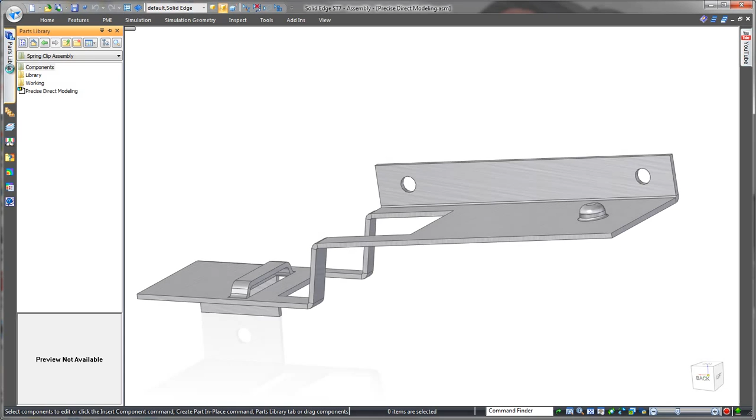Let's take a look at the precise parametric control on offer while we progress our spring clip concept. First, let's bring in our spring clip and assemble it with the parts it was intended for: the clip to the base, and the USB block it needs to hold.

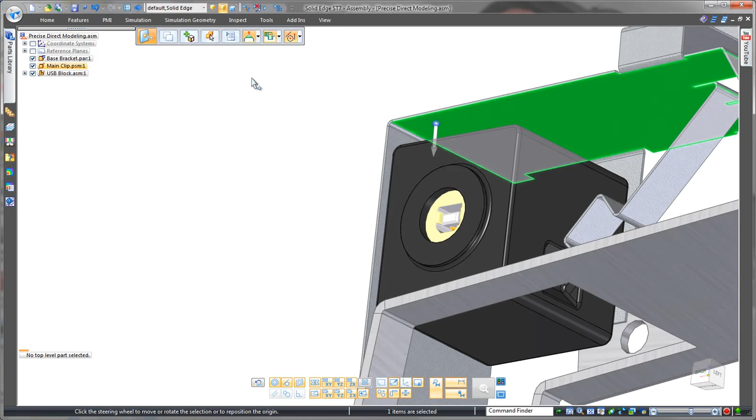The first precise change we need to make is to close up this gap between the top of the USB block and the spring clip. In most any other CAD system, you'd have to make this change at the 2D sketch level with sketch relations. In Solid Edge, we can simply relate faces in 3D instead.

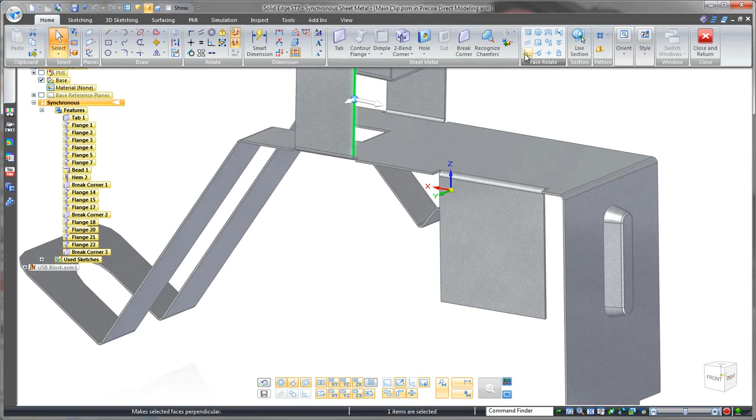Easy. Looking at the back, I noticed the tabs on the top are not quite square with the top face. No problem, a couple more 3D relations will fix this: for the side faces of the tabs, making them perpendicular to the top, and for the top faces, making them perpendicular to the side. Notice how both tabs are being updated here - that's the intelligence of synchronous technology.

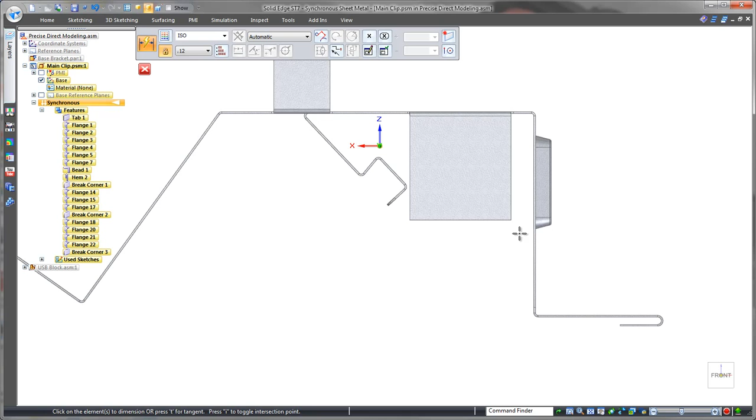Let's start detailing this model, and of course dimensions are key. Solid Edge has two main ways to dimension. The first is like most any other CAD system, in 2D when creating a sketch for a feature, but the second, which you see here, is unlike most any other CAD system, and much more intuitive - just dimension the 3D model directly.

We can leave this floating so that we still have the flexibility for further changes, or lock it down to be precise. We'll lock this down and we'll add another one for the flange width.

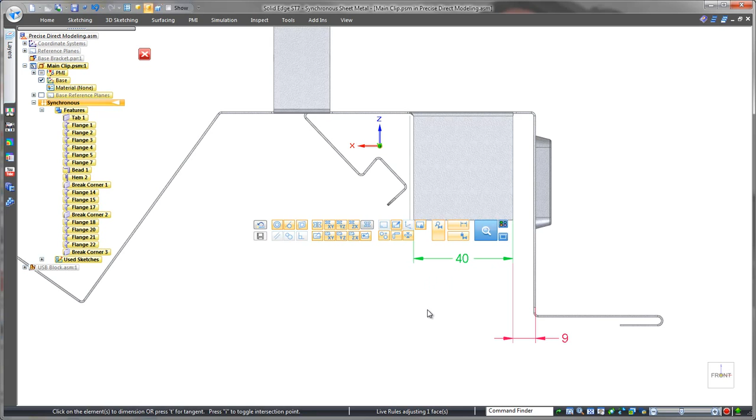We'll dimension these top tabs next, and look closely at the precise control that's provided. These green arrows allow us to control the direction of the change, which side moves and which side stays put, or even a symmetrical change if we wish.

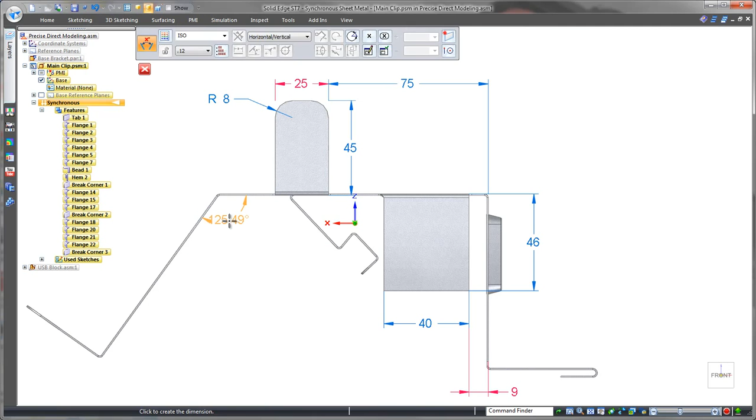We'll speed through adding the other required dimensions using the same technique, and for your information, the red dimensions are the ones we've locked down, and the blue ones are the ones we've left floating. Overall, notice how easy they are for someone else to understand - great for reviews. Oh, and of course, we're not just talking linear dimensions, let's detail the angle here too.

We should finish working on the other end of the clip. Another 3D relation will do the trick to move and match the angle of this piece. And we can use what's called the steering wheel to drive a synchronous drag and snap into place here.

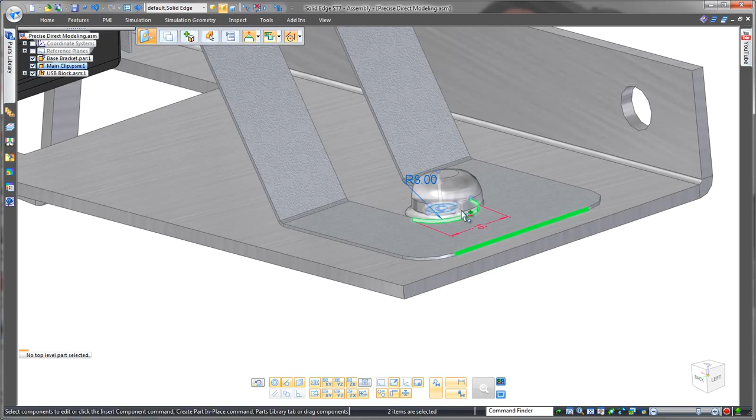And let's make sure that the whole thing is assembled centrally. Next up is the retaining clip that needs to slot inside the groove of the USB block. Once again, an easy face relation, or steering wheel, drag and snap can be used - whatever's easier.

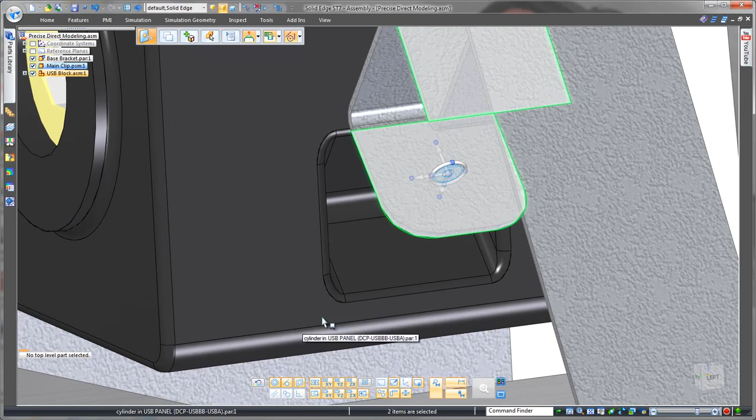Perfect. One last subassembly to bring in, an inline fuse. The purpose of the top tabs are to support this, so we need to make sure it'll fit tightly into place. So let's make some more precise direct edits.

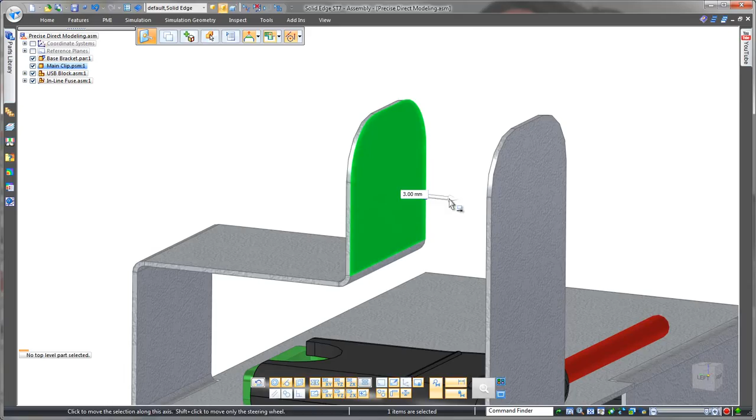Now I know the wire diameter is less than 3mm, so what we can do is drag the steering wheel to create a 3mm offset before dragging and snapping the tab itself. This leaves us with a 3mm gap, precisely how we want it. Let's drag this section in too, up against the fuse.

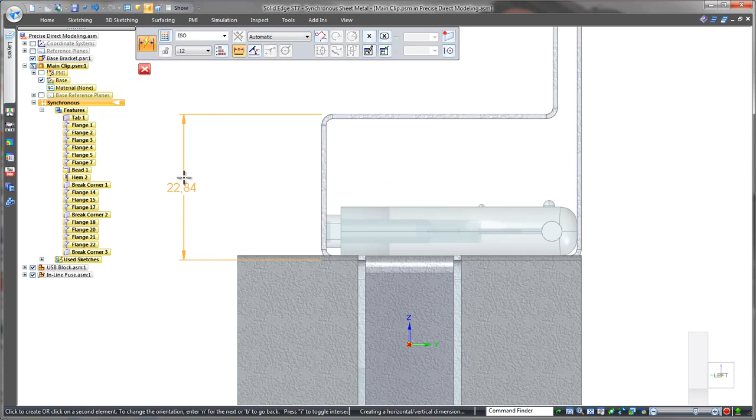Something worth noting is that for sheet metal dimensional control, we can design to either the outside or inside. It doesn't matter which dimension we change, be it inside or outside - Solid Edge will always take into consideration the material thickness.

Design complete, and of course it doesn't stop there. We can take this same all-in-one concept to final model into a manufacturing drawing.

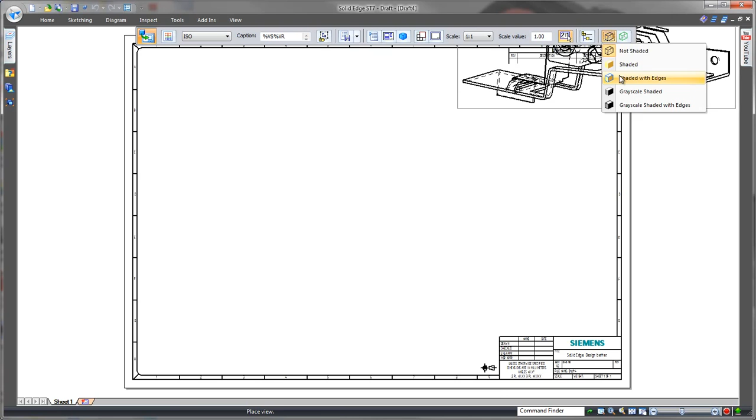First of all, let's create a custom view of the assembly so that all aspects of the part can be seen. Let's have that shaded, and a few views of just the clip. And remember the 3D dimensions we added to the part? Look how quick we can bring those dimensions into this view.

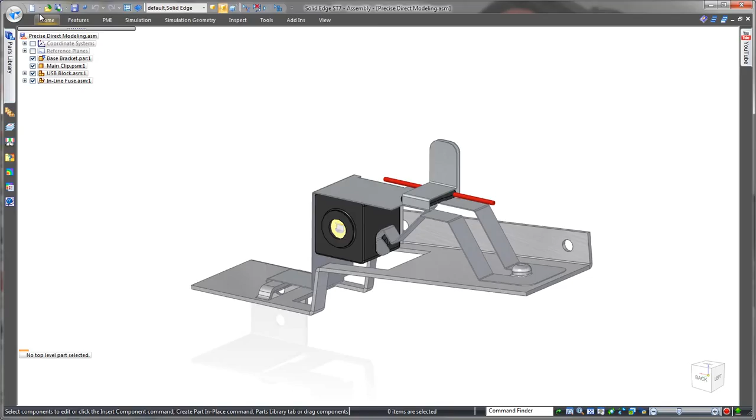So in summary, we've seen how Solid Edge with synchronous technology provides rapid direct modelling, but importantly with precise parametric control - relating faces, dimensioning, detailed drag and snaps, all in 3D, no sketch work in sight. Fast and easy, but most importantly accurate. Solid Edge, design better.